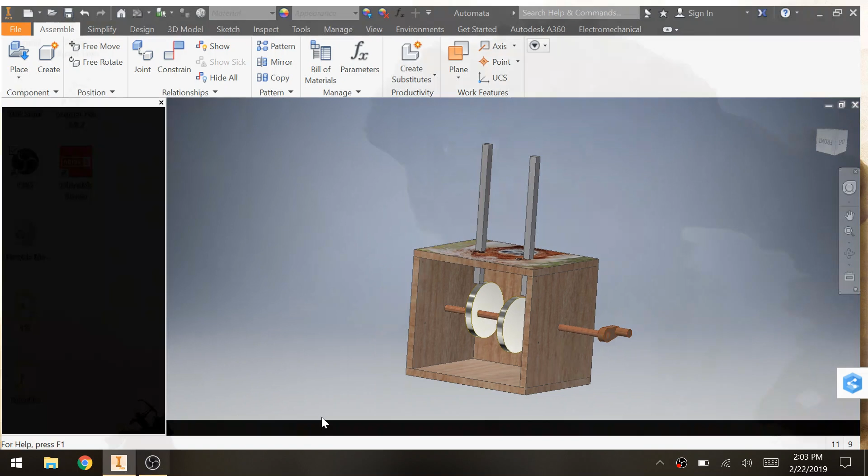When we start, this is the finished product, right? This assumes that you have finished all the pieces that you need. And obviously, as you're making this, if you figure out that you don't have a piece that you need, you'll be able to just make it, and then you continue the process, okay? So right now we have 1, 2, 3, 4, 5, 6, 7. I have 8 unique pieces.

If I go to my folder where everything is stored, it is... So I have my own folder called Automata Parts. And I have 1, 2, 3, 4, 5, 6, 7, 8 unique pieces. I'm going to tell you right now that some of these, especially like the side, top, and top bottom, you might just make copies of, and you don't have to. Oh, when we get there, we'll get there.

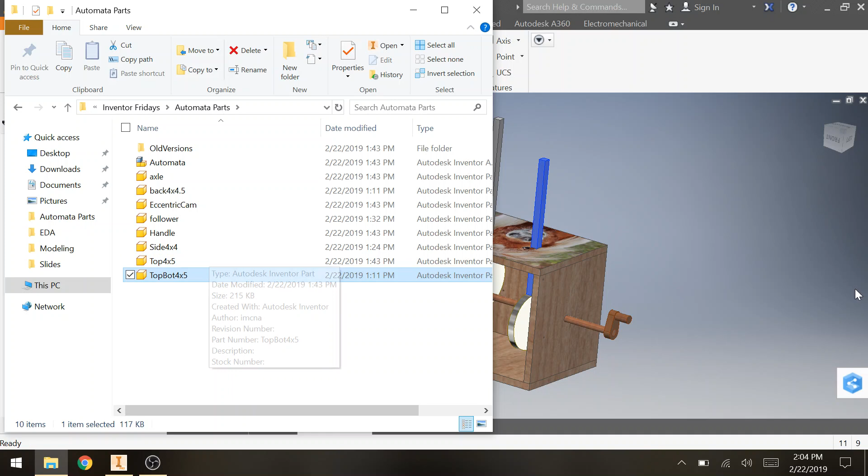All right, so let's get started. Let's make a new one. So for making an assembly, first we're starting with a .iam, right? English units. Press create.

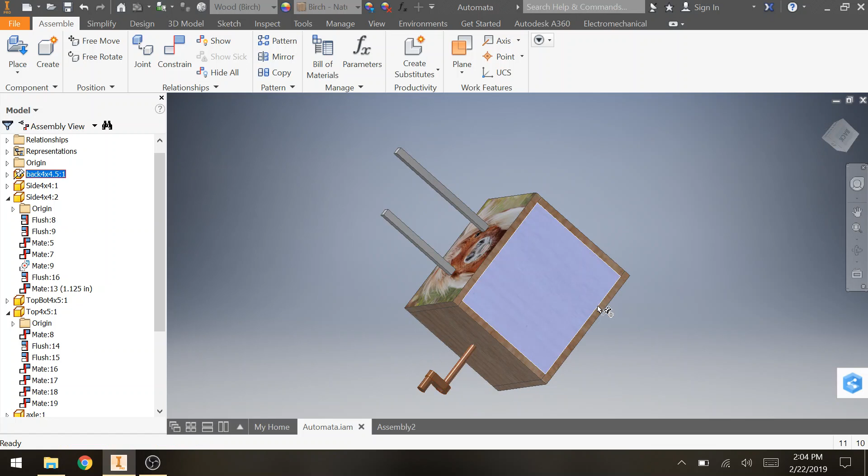Cool, and so we'll use this as reference if we need to. But now we're going to get started. So the first thing I want to place is my back piece. So my back piece is just this one right here. This is the one that's the weird numbered, weirdly dimensioned shape. It's the one that's the 4.5. So thankfully, the way I labeled all of my pieces is I named them what they're for, right? This is the back 4 by 4.5 piece. So I double click on that.

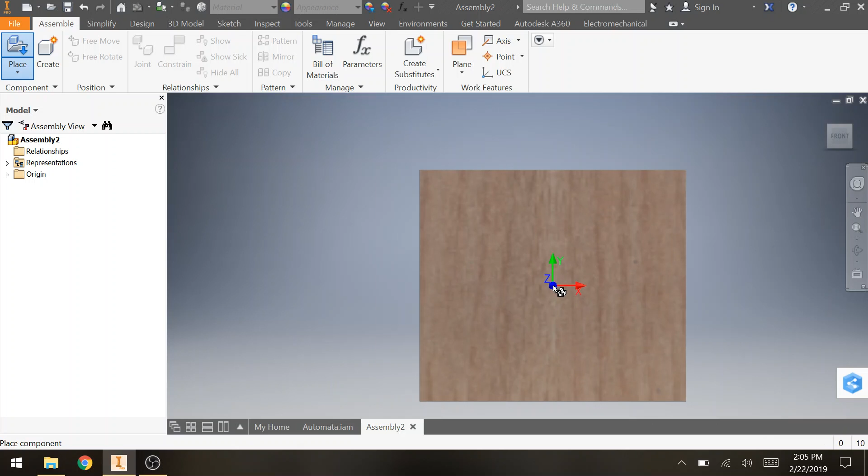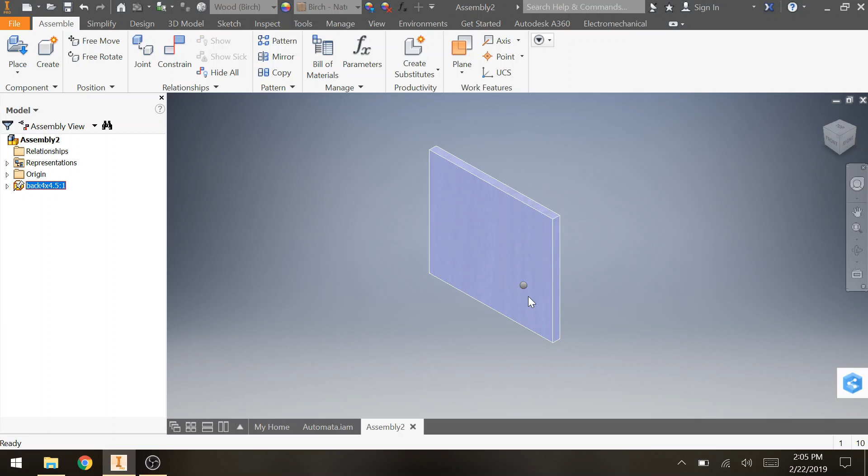Press open. And this is going to be very important - this is going to be the first thing that you write down. Well, first off, you probably don't need to write this down, but obviously when we're doing place, we're not placing from any of these. We're just doing the normal place. But the first thing we do is this moves around - we don't want that. We want to right click on it and ground it. And by grounding it, it basically removes or fully constrains it in such a way where it can't move at all. So now, when I try to click and drag, it won't move. But when it's not grounded, I can move it. So I ground it. We're good. If I press home, it zooms in on it.

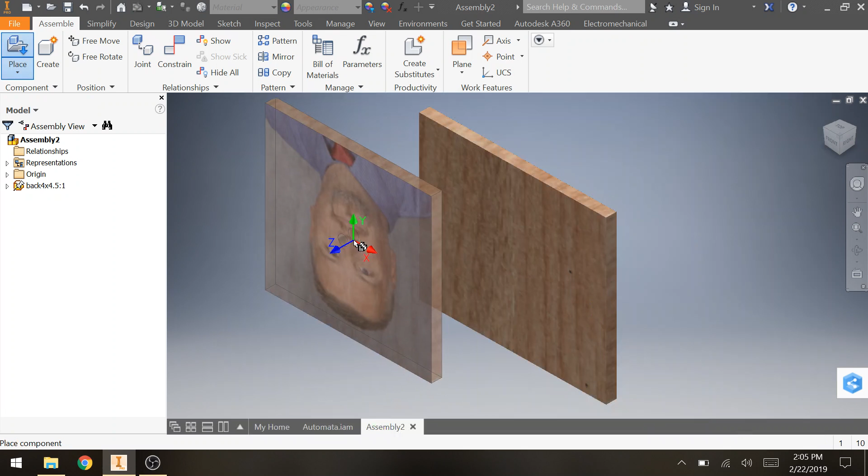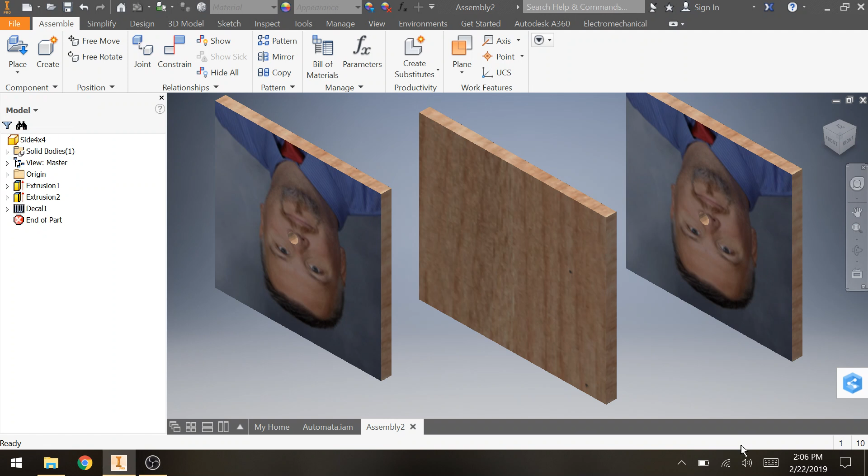Great, so now what we're going to do is we're going to start with the side pieces. So I go to place. And this is going to be the thing that's going to be kind of annoying, and I'll show you in a second what happens here. So you're going to see that this one already has Mr. Queenet's face on it. Something that happens is because these two pieces are the same piece, they're the same exact file. So if I open up the original file, open, I got to go all the way back to it. It's in documents, it's in, and then I go to the side. So there's only one of these, right? If I open it, you'll see that it has a hole here, and it has this picture already on it.

So I'm going to do a couple things to this, and you're going to see what happens here. So I'm going to get rid of this decal. Okay. Now check out what happens in the assembly - no more face. In fact, even in my original one, no more face. Right? Because they're all connected to the same exact file. Let's go back to here.

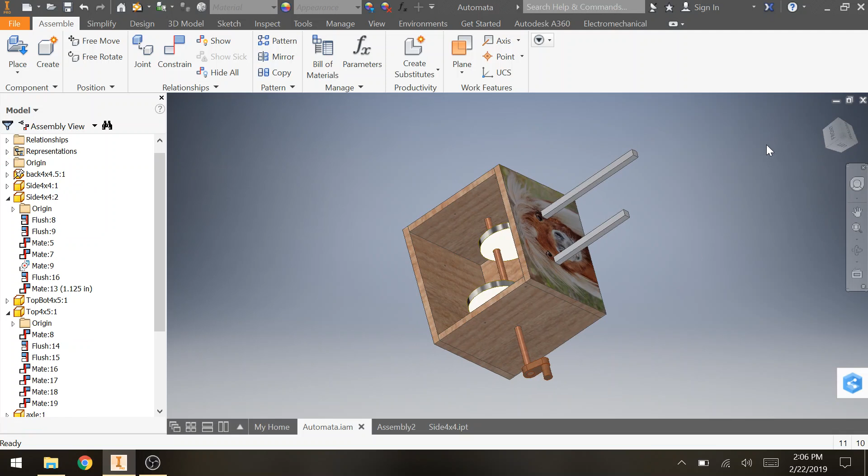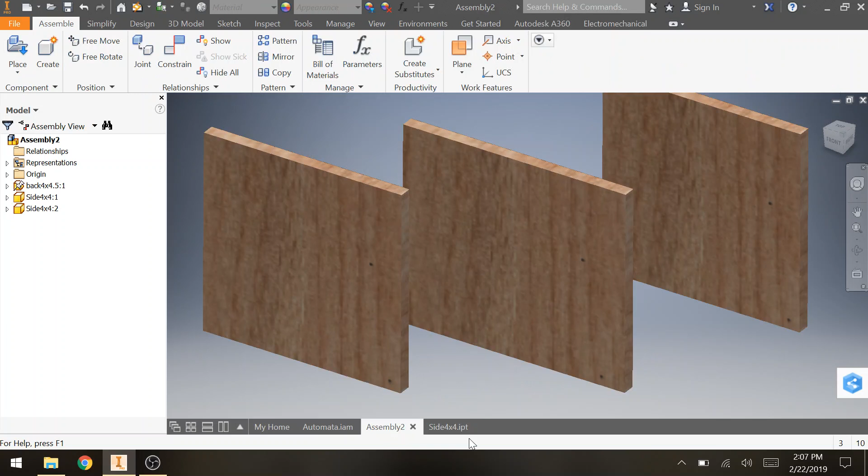I also want to get rid of the hole for now because does the hole look centered? No, but I can guarantee you that in the box itself, it is centered. And you're going to see exactly why. So I'll get rid of this for now, just to show you how we'll kind of work with that. So now we have this blank piece right here. We do File, Save. We go back to my assembly. And now we have my two side pieces, and we have my back piece that I can't move.

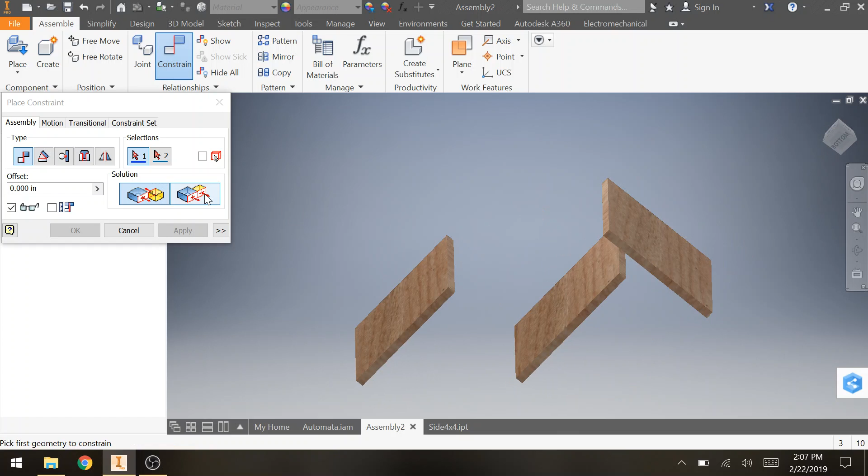Okay, that satisfying sound means we did something right, hopefully. Now I'm going to make these two sides flush. So the bottom of this, press apply. Bottom of this, back of this, press apply. And we look at it. Ooh, it looks pretty good, pretty good.

Press escape for now. Now I'm going to do the click and drag test. I click and I drag it. If it's not moving, we're good. So now we're going to do the exact same thing with this one, with the other side.

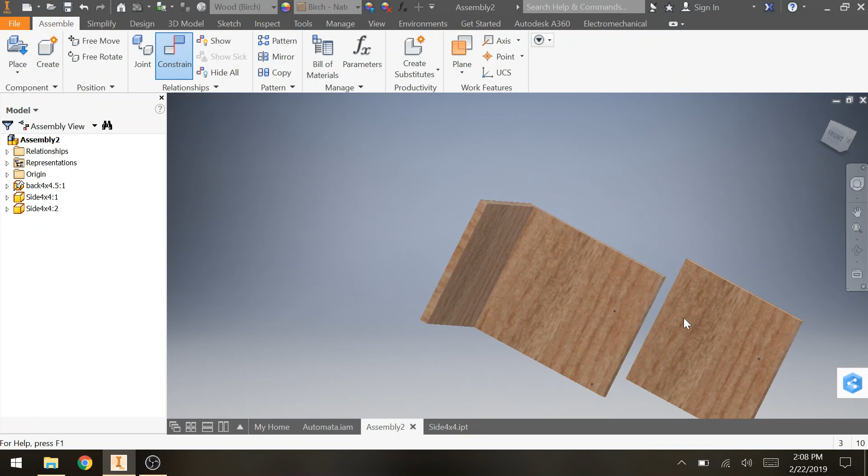So I'm going to choose either face. It doesn't really matter which one I choose, right? So I could choose the back one. And that one is going to be glued to right here. Then I'm going to make these the bottom and back flush, so this bottom piece right here with this part right here. And then we want apply.

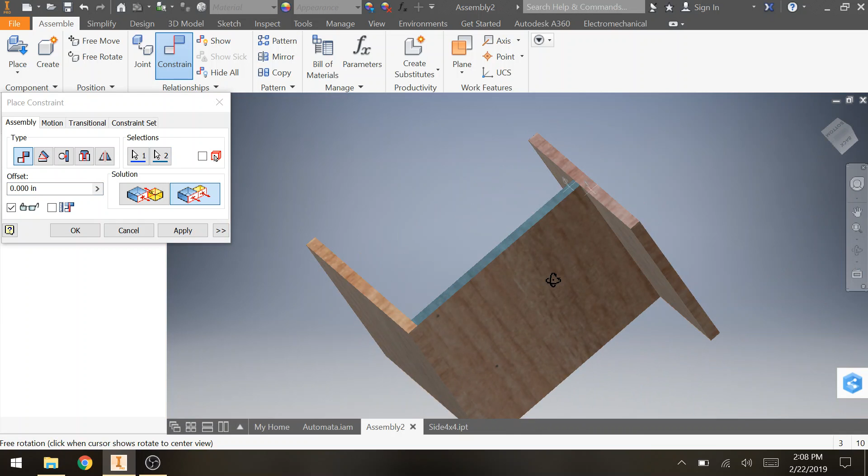Want this one and this one to be flush. Notice the flush constraint, right? Press apply, and get out of that. Let's go back to home. Bam, looks great. When we do the click and drag test, it's good.

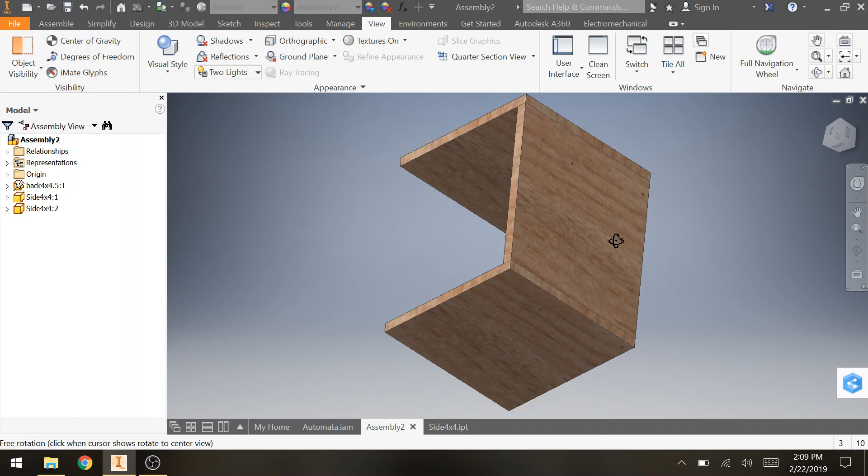Something else that might be helpful is go to view. I'm going to change the visual style to shaded with edges. This way it just lets me see where all the little edges are. So if I zoom in a little bit there, you can see the edge. Cool, so now we are going to go to the top and bottom piece.

And here's the issue I run into. Do you see how I have a top and then I have a top bot piece? I need to cut holes in one of these, but not holes in the other one. So do you know why? Can anyone tell me why I needed to make two files?

There's going to be the hole for the followers at the top, and then at the bottom it's just one solid piece. It's supposed to be one solid piece. If I put holes in one of the files, it's going to put holes in all of the top bottom files.

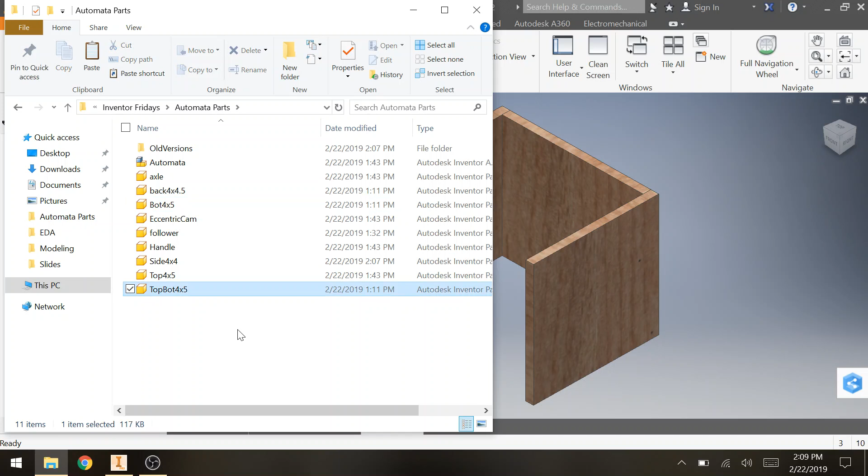So the way that I did this, all I had to do is I just clicked on this one, did copy paste, Control C, Control V, and then I just renamed it. I'm going to call this one bottom 4x5. So now I have my original one, I have a separate file for the bottom and a separate file for the top. This way I can edit one and it won't change the other ones.

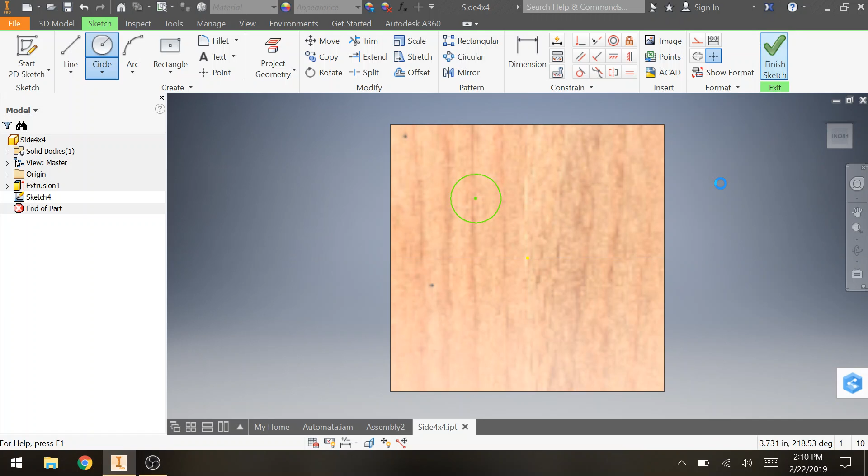So to show you what I mean, keep in mind how these two side pieces are exactly the same, right? If I put a hole in one of these, I'm just going to put it in a random place right now. Extrude, cut, bam. Okay, so there's a hole in this piece, but this side 4x4.ipt is connected to these ones, right? And so I can't do anything about that. There's going to be a hole between both of them.

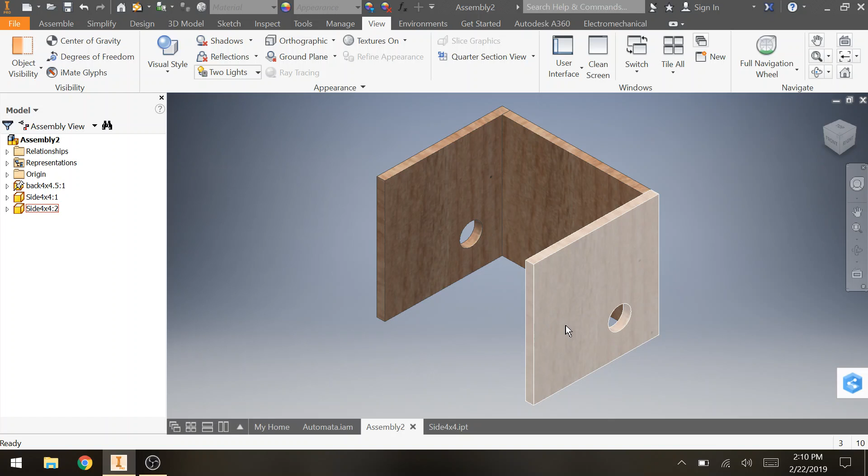Right now for me, this is fine for these two because they're symmetrical, but for the top and bottom, they're not symmetrical. So I'm going to get rid of this piece.

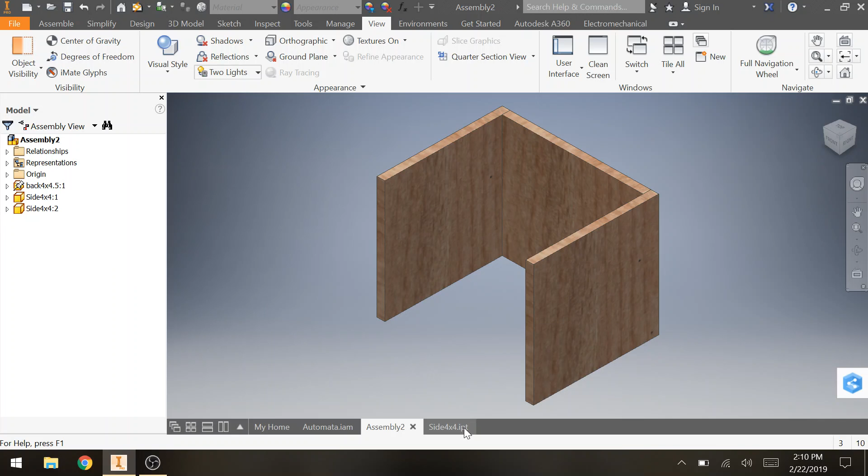There we go, we'll save it again just to make sure. Finish, get rid of the sketch, don't want to have extra sketches. Save. We go back to my assembly, and everything's good to go. Everything's normal again. Okay, so let's add in our top and bottom piece.

So I go to Assemble, Place. We go to, I have a top one and I have a bottom one. So let's do, I'm going to be using top bot 4x5 and my bot 4x5, and I'll show you why in a second. So my bot 4x5 is the bottom piece of my Automata.

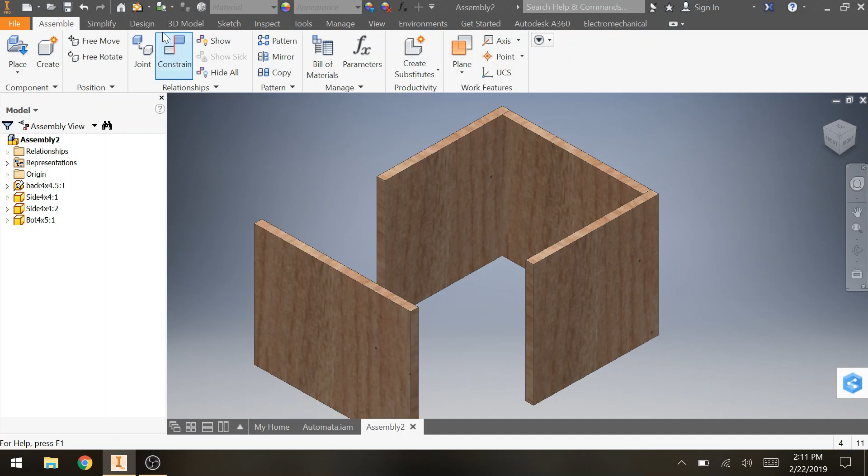So I start here, do the same exact constraints I've been doing the whole time. So I want to make this one to the bottom of these faces. Press apply. And then I just need to make some of these flush now. So this will be flush with this, apply. This will be flush with this, apply.

So anything that you see me do that you think you should write down, just write it down. Be like, okay, in order to do this, I need to click this button and then these two sides. So now we're done there.

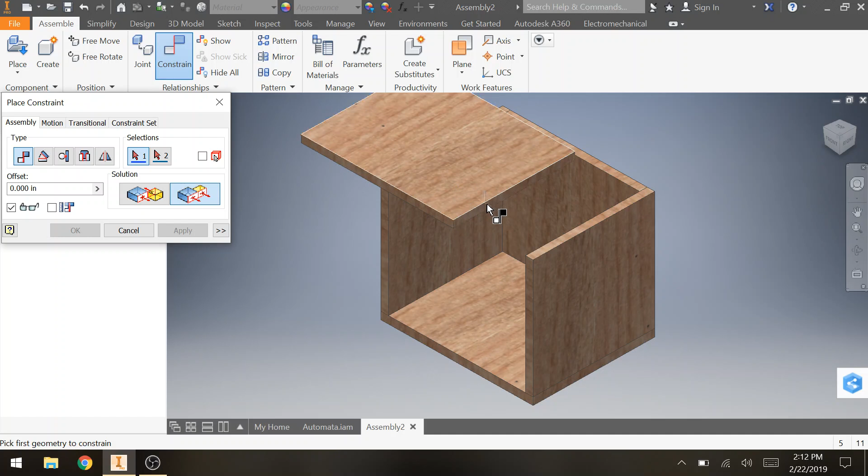Now go back to top view. We're going to do the top of it. So go to place, go to top bot 4x5, press OK. There we go. And then I'm going to just do the same constraints I've been doing. Apply. Make this side flush with this side. Apply. Obviously I'm going fast, so if you're watching this, you can go on like 1.5 speed or like half speed.

I guess 1.5 speed would be faster. So, and then we're good. And then we can do the click and drag test.

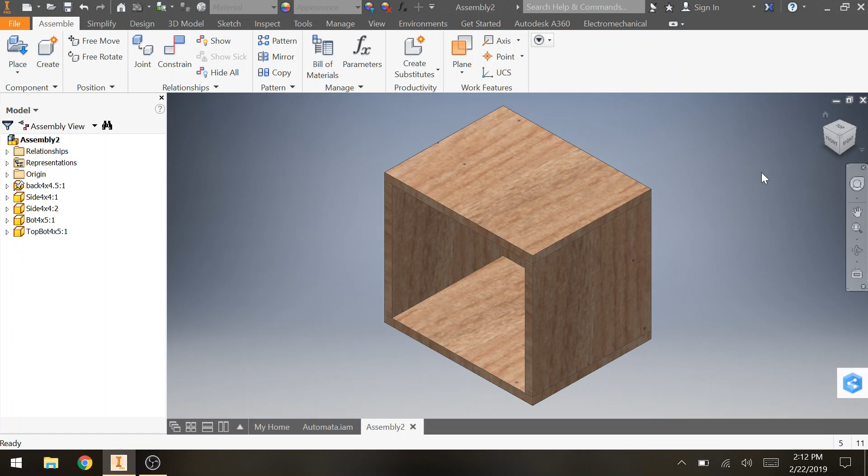Right, so we're good here. This is a nice, solid, just box. Now we're going to talk about adding in some of the different parts. We have to make all the different holes, right?

So here's the thing that is kind of weird. Okay, we know that this piece right here that's highlighted, it is a box. It is a perfect square, 4x4. But if we go and look at it in here, is the distance from this line to this line going to be 4 inches? It's going to be shorter.

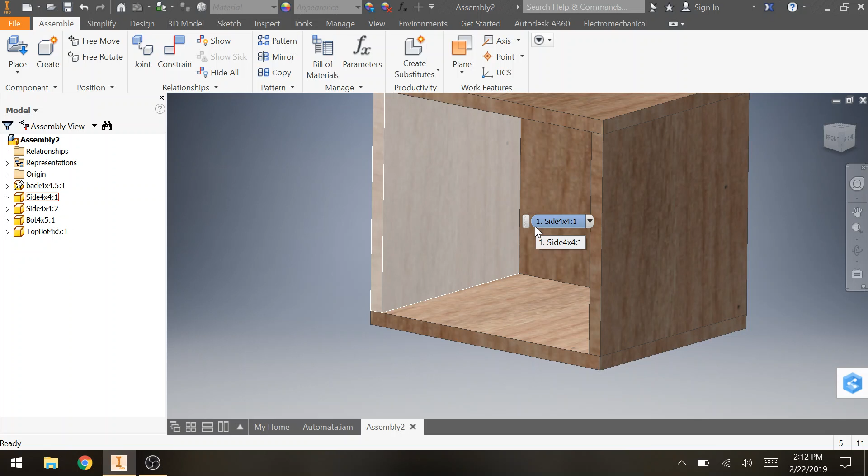And there's a way that you can measure exactly how long it is. If you go to Tools and you go to Distance, you can actually click on this line right here, and then click on this line right here. So this is 3.75. I want someone to store that in your brain. 3.75. I need to make the axle in the center of that specific distance, right?

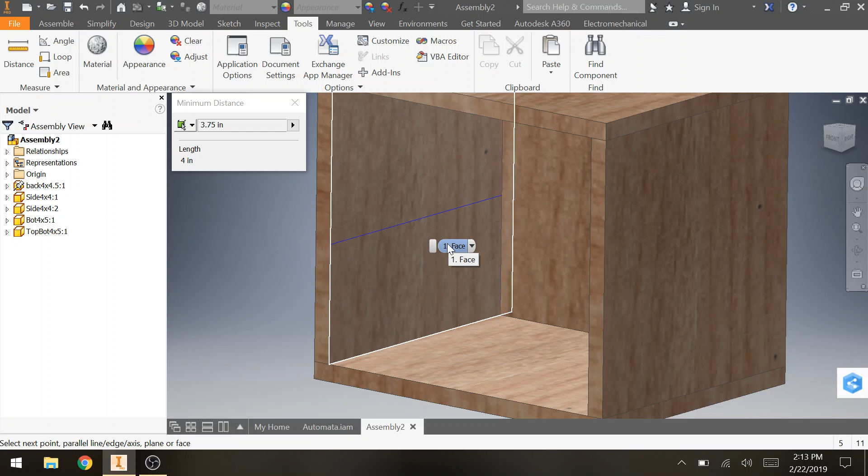Because that'll be in the center of my inside interior box. I don't care about the outside interior box. I need the inside interior box for that part to be centered.

And now, check this out, okay? If you double click on a piece, you can actually edit that piece. So I'm going to double click. And now, see how everything, you've probably accidentally gotten to here before, right? Everything gets kind of shaded out.

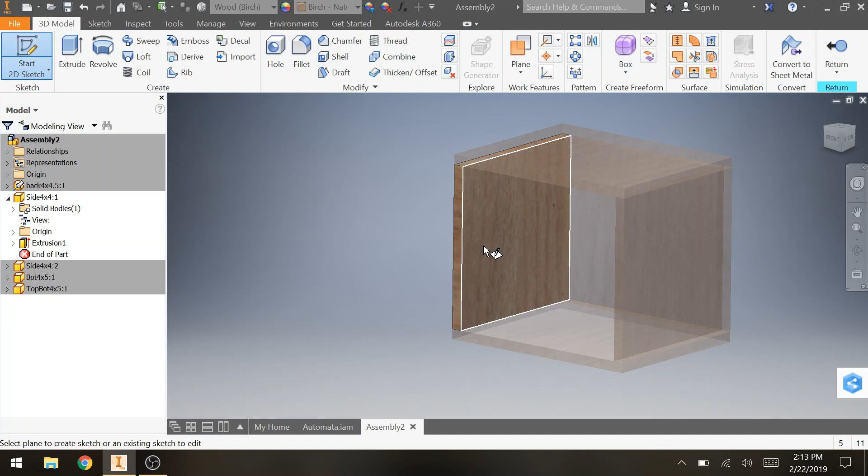Now I'm going to actually just make a sketch here, and I'm going to make a hole. So I'm going to start a 2D sketch. This is the same way I've been doing everything before. I'm going to draw on this face.

Now here's the harder part. I know my circle is going to be on this line somewhere, but I'm not exactly sure. So I'll make this, it should be 0.25. And then, how far should the center of my hole be from this line?

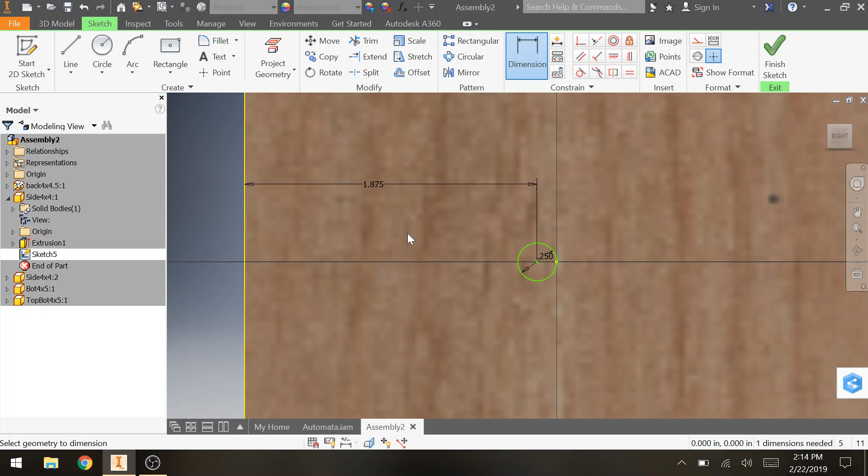Not 3.75, but half of that. So what I can do is do 3.75 divided by 2. Press enter. And it's pretty close, but that's good. Perfect. So we do finish.

Great. And we can also even look at this one. That looks good. They're lining up here. And then we just go to extrude. And then instead of that, we're going to go to right here, cut. Press OK. And then we go to return. This is important. Return. And now we have a hole that is in the center of this box right here.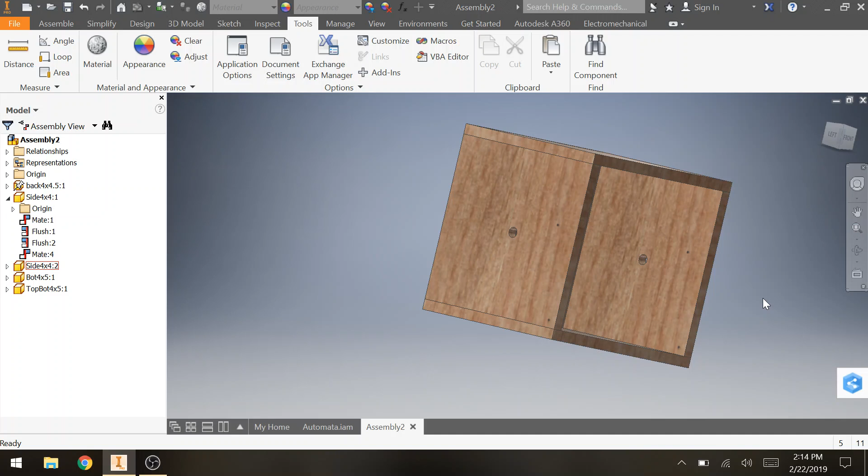So now we're going to do the top ones, right? So we're using square followers. So same idea. We just double click on the top. And I'm going to do a top view like this. And now I'm going to start a 2D sketch. So what I'm going to do essentially is I'm going to make a bunch of lines

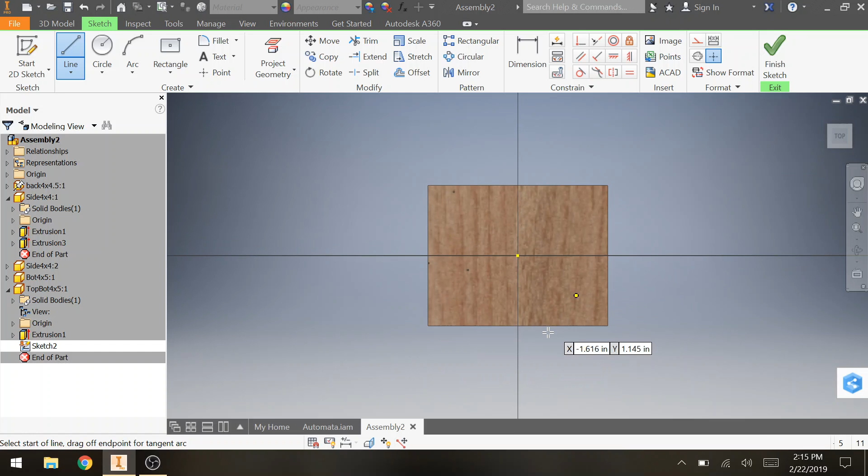so that I can be 100% sure that my followers are going to go exactly on this little axle line here. So I'm going to make a line like this. Let's go to the top. This line's going to be from this edge. See how it turned green? And then I'm going to make this that exact half distance. So it's 3.75 divided by 2.

So now, right, if I make a line that is parallel to the edge of the box right here, anything that I cut into that side or cut into that line, they're going to fall exactly onto my axle. So I'm just going to make another line from here. And remember, if it turns green, that means it's locking into something. So I click there. I make sure that I'm 180 degrees. I go all the way to the edge here. 180 degrees, great. And then I'm going to go back the way I came. Great. And these lines, they're just for me to know exactly where I'm going to put everything.

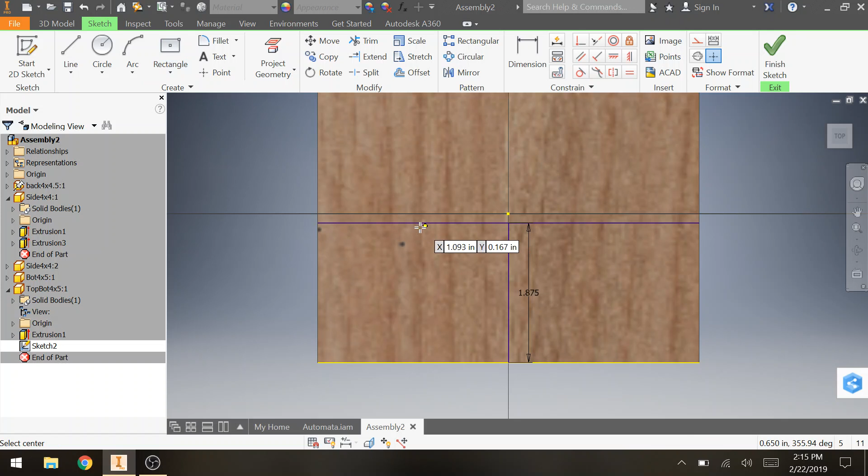So I'm using squares. So I'm going to do a 2-point center rectangle. For many of you, if you're just selecting this or just opening Inventor, you'll need to go to one of the options, so 2-point center. So I want the center of my rectangle, right, to be on this line. So I click. It's going to be 0.25 by 0.25. So I just did 0.25 tab 0.25.

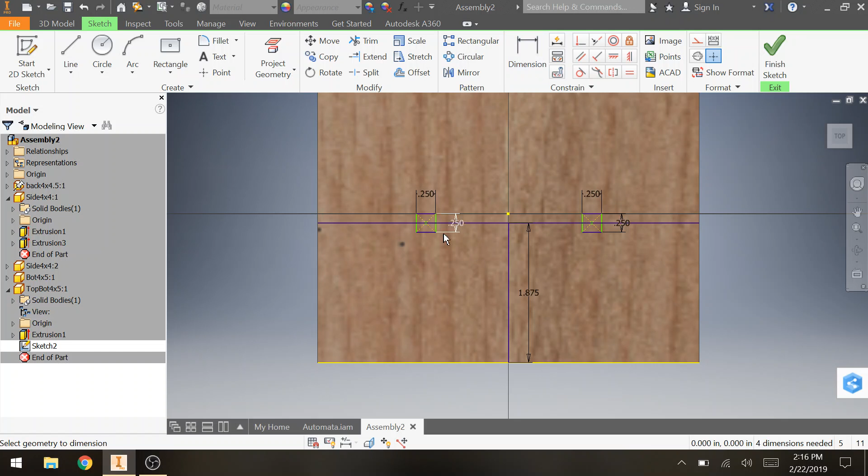And I'm going to make another one. Right, make sure it's on that line. 0.25, 0.25, enter. And now I'm going to press escape. I'm going to use the dimension button to move them a certain distance away from each other. So I want them to be, how far should they be away from each other? You can choose. 2 inches? Does that sound good? Sure, 2. Yours might be different.

You just have to measure it. So this one's 2. And now I also want to make them centered, so from here to here. So I have to do some math.

My box is 5 inches long from there to there, right? These two are 2 inches away from each other. So I think this one's just going to be, let's make it, what would it be? Would it be just 1.5? There we go, that's good. So now this 1.5, this one will be important for later, but this makes it so that everything's kind of nice and centered. That's good.

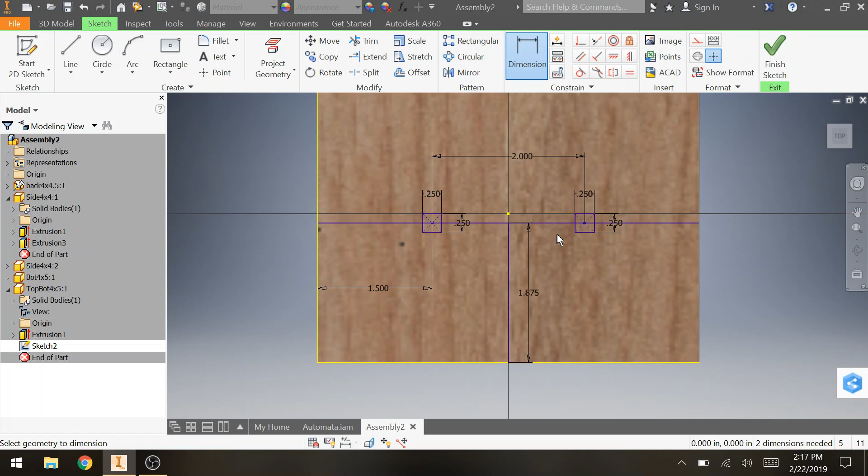So we'll do finish, and just like what we've been doing before, extrude. We're going to make a cut here and here. Press OK, press return, and there we go.

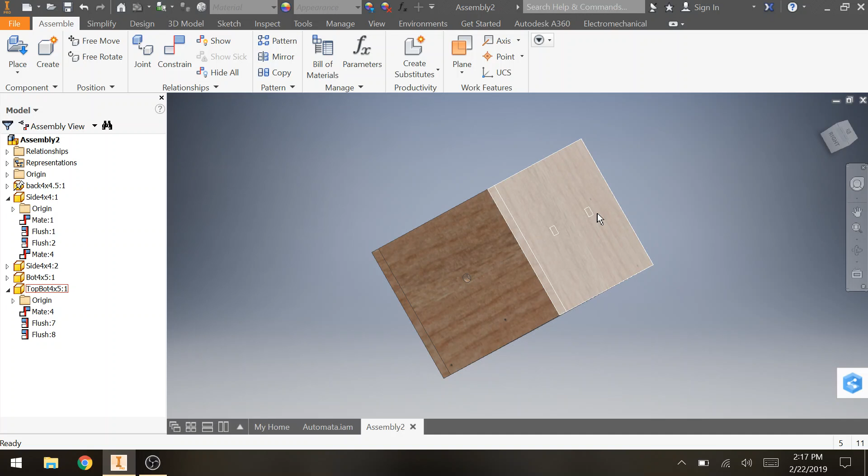Does that look good so far? Looks nice, right? And if we kind of look at it, you can see that the hole, the axle hole, lines up with the follower holes. And that's what we need to do, right? So with that one, you just have to be careful and be thoughtful about your measurements.

So now we're going to start adding in the other pieces. So let's go to place. We're going to do the axle, so we'll just do one at a time. My axle, I think my axle is 7 inches long, I just made it a random amount. So we go to constrain.

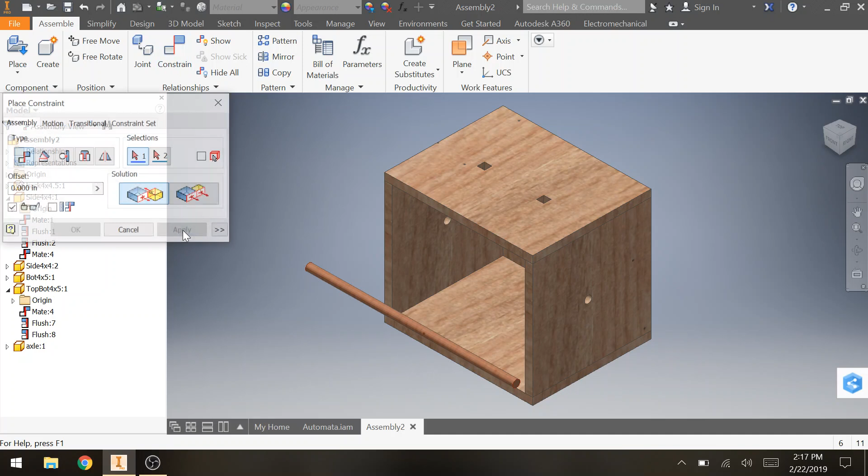For things that are circular, you can just mate the center lines. So see, make sure it's dotted like that, center line. You can do either one of these, doesn't matter, like that, press apply. And the other thing that I want is I want to make my axle flush with the other side of the box. So we will, it's a little hard to see.

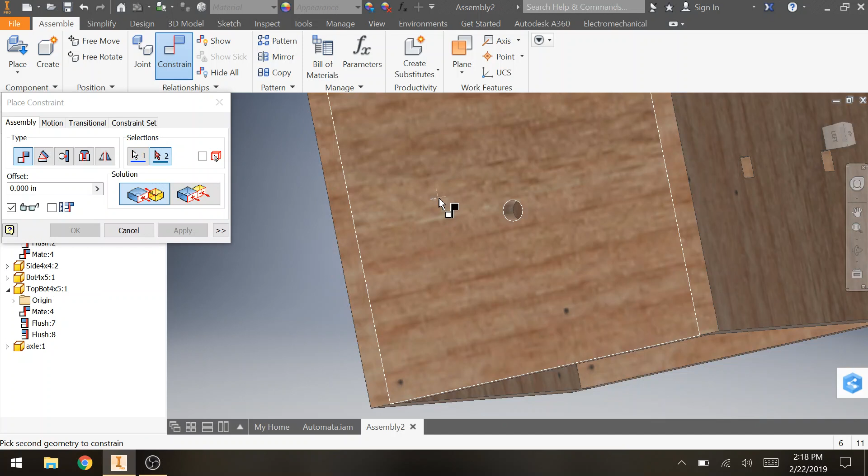So I did the wrong thing, so I just do flush. There we go. And I go back. Great, and you can't see it right now, but I can rotate this as well.

Cool, so now I'm going to get the handle on. So this is what my handle looks like, yours might look different. It's going to involve the same steps.

So we get that center line, we made it with this center line. Some of you, when you do this, it might actually flip around to the other side. It's fine, just make sure the two sides that you need to be flush are flush.

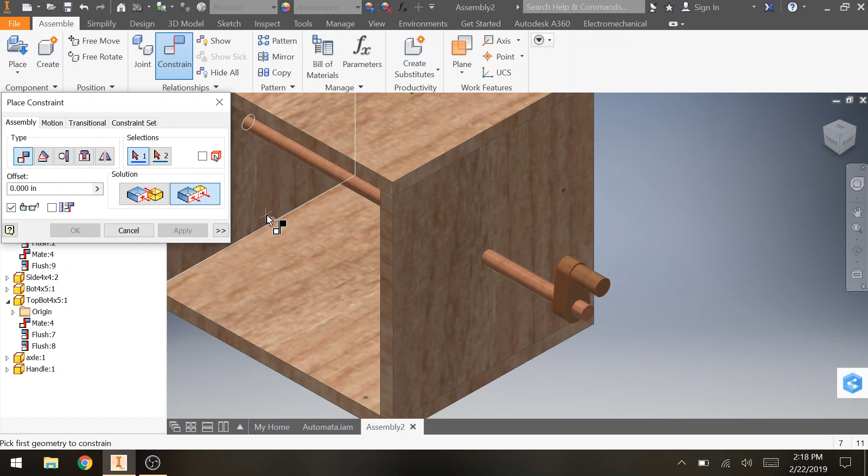So for me, I need this side to be flush and this side to be flush. But if yours was flipped around, you could actually flush this side and this side, and it would flip for you. But for me, I got lucky this time, they are the right direction. So I can just click, oops, flush, do, apply.

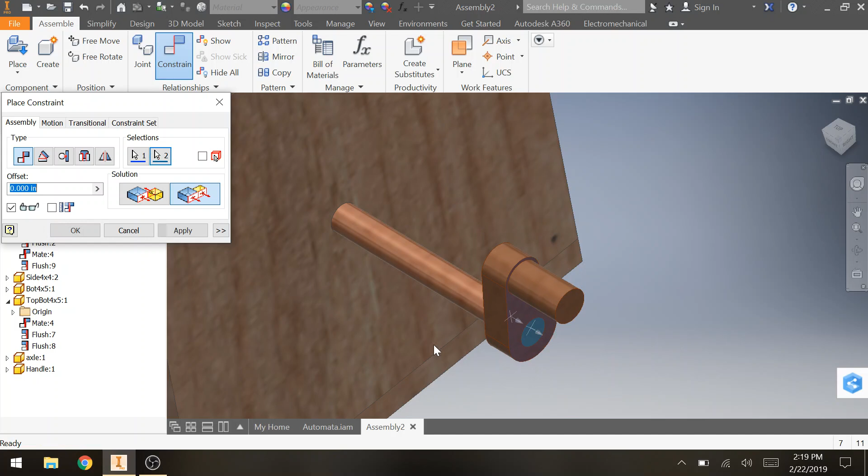Great, almost there. If I move this, the axle doesn't move, we'll fix that later. So now let's add the cams in.

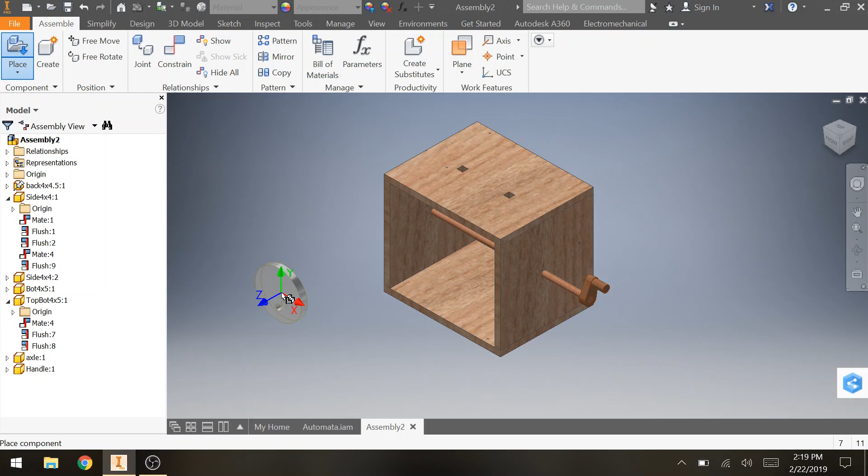Go to place, I'm doing 2 cams. And this is a special direction just for this project. For whatever reason, there are some weird things that happen with the animation part. So if you're having big issues using snail cam, hex cam, whatever other cam, just use an eccentric cam and I will accept that, even if in your real project you're not using eccentric cams. Okay?

So we have these two. I'm going to constrain, same idea as before. These are circular, so we mate the center holes with the axle. And we also press apply. And we do the center hole of this one with the axle. Great, apply. Let's look at it now.

They are not even, right? They're not in the right place. And I can move them. That's not good either. So what I'm going to do is I'm just going to mate them, but then I'm going to offset them. So I'm going to constrain.

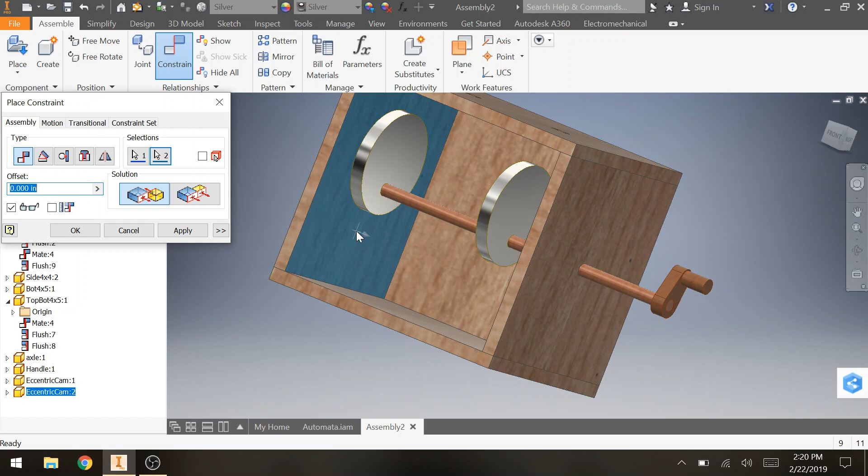Let's mate this side with this side. Obviously, we don't want it touching the wall, but does anyone remember how far away our cam was, or this hole was, from the wall here?

It was like 1.5. Actually, but there's an issue here, so let's just check. So let's go to Tools, and we'll just measure. So from this line here to this line right here, it's 1.125. So that's the offset I need, is 1.125.

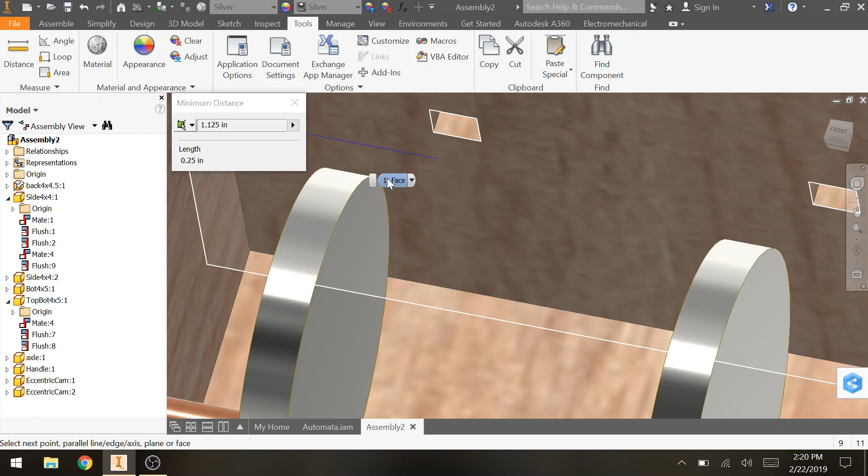So let's just do that again, because it was from the edge of the box. Exactly. So, and then I do my offset.

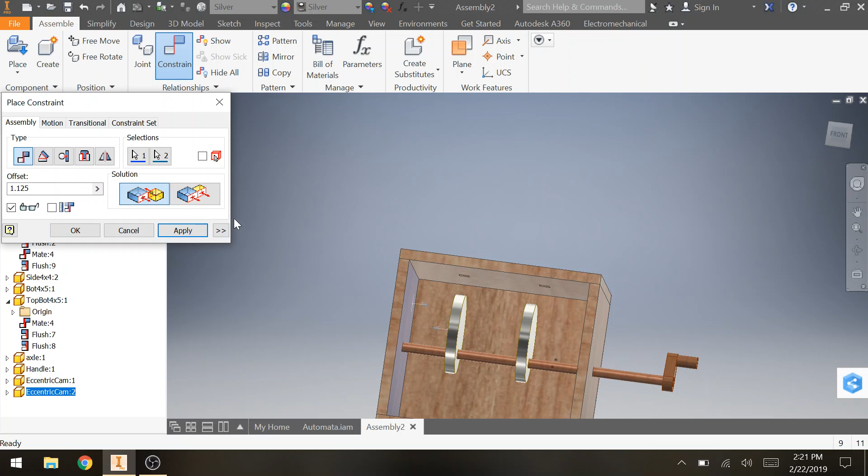So let me zoom out so you can see exactly what's happening. So this is normally what mate does, but then I go to offset. It is 1.125, and it moves. And look, it's like perfectly lined up. Press OK, apply.

And we do the same thing over here, here and here, and we do 1.125.

And now when I spin this, nothing happens. But if I do my moving test, it's staying on the axle, that's good. Everything's staying where it should be, and it basically has the attributes I want.

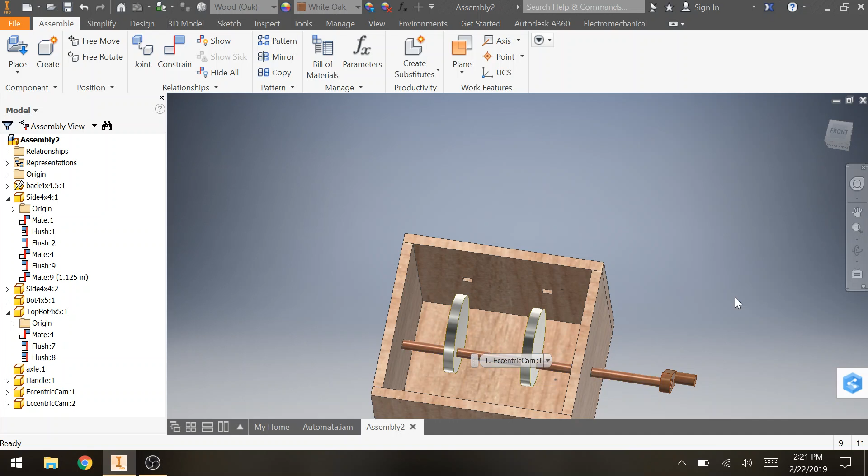The next part is probably one of the hardest parts because we're mating planes that are internal to our object. So what I'm going to do first is start here. Notice when I click on the handle, in my browser it also lights up. Let's clean this up a little bit, close these.

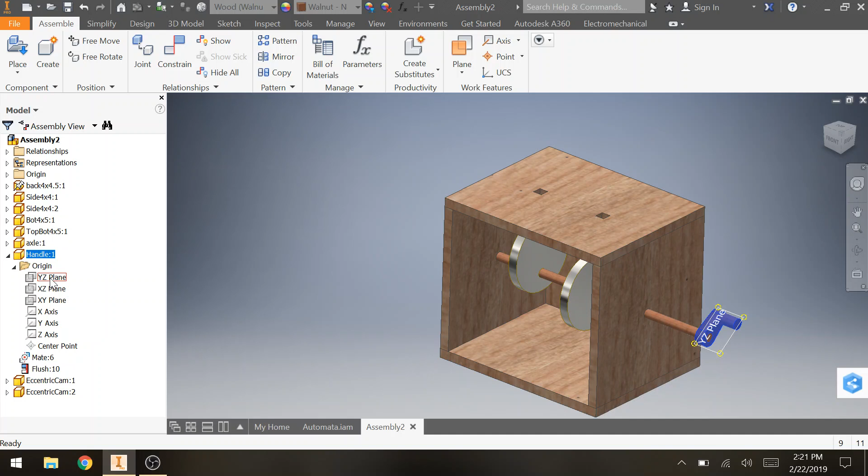So if I click here, handle lights up, go to origin. And I want to make one of these planes visible. The one I'm going to make visible is this one right here. For you, it might not be the YZ plane. You need the plane that basically goes through the center of it, the one it'll be rotating around. So I'm going to right click on this, make it visible.

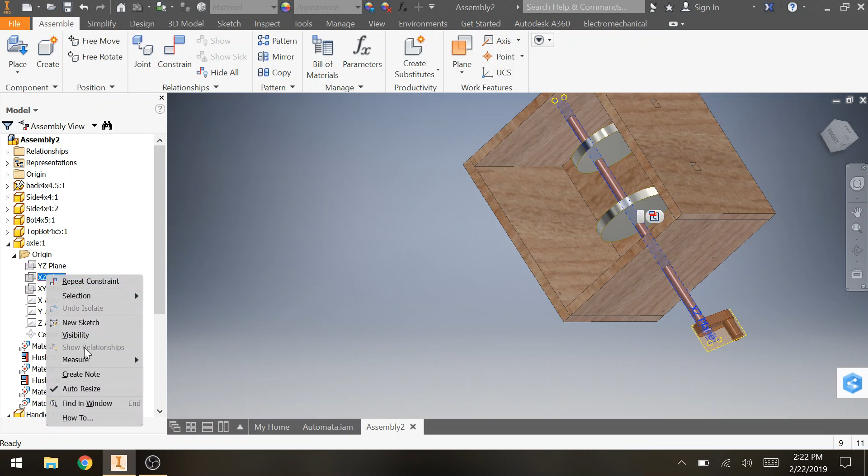Do the same thing for this one. We go to axle here, go to origin, and we're just looking. Okay, this one doesn't look right. That one looks pretty good. So make it visible. And we need to do that for our cams as well.

Just cleaning this up a little bit. Origin. That one is actually pretty, it doesn't really matter, either one of these is okay. The one that would not be okay though is this one, right? That's not the way we want to rotate. So, sure, let's do this.

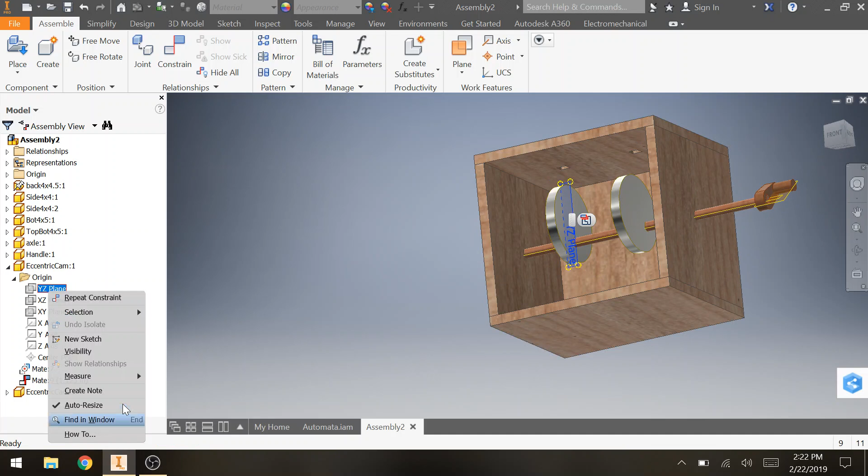So now we have all of these here. Notice how when I made one cam visible, the other one was automatically made visible because the files are connected. So now I'm constraining. With some of them, we can just easily constrain like the planes, and Autodesk is cool with that. So now when I rotate this, you can see that my axle moves.

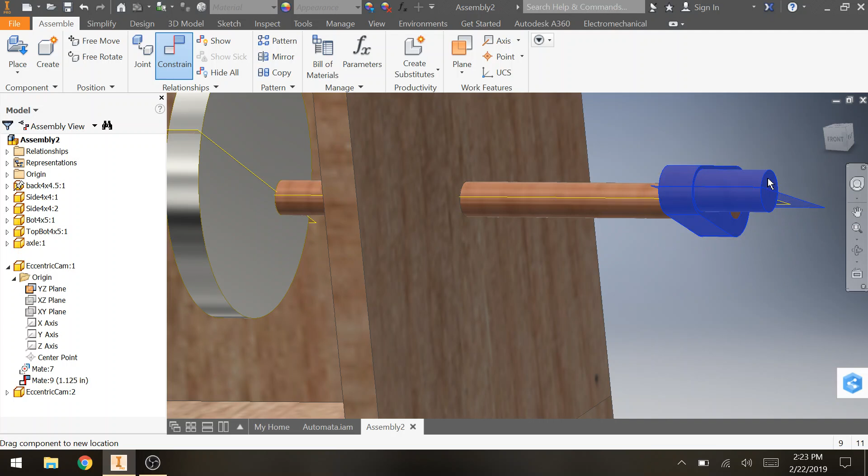Now the other thing that's maybe a little bit harder is this one. It might work if you made it, but if it doesn't work, you can also go to angle constraint. So go to angle, we're going to click on directed angle, and we'll click on this one, and either one of these. Press apply, and then this one, same one.

They're the same direction. I'm going to make this one 180 degrees, just to make it a little bit different. Press apply. You'll have to play with this angle to figure out exactly which way you want to have it. So now, when I go back, look at that. Whew, we're almost there, we're almost there.

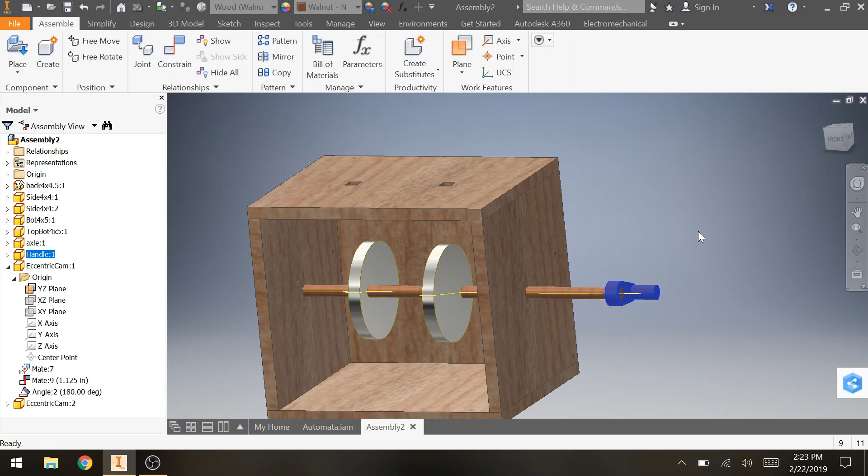So now the followers. There are some special rules with the followers, and I'll go through them right now. If you ever have issues with them, just look at this video again and use the followers that I created, use the eccentric cams, and you should be good to go. So let's place the followers.

Follower. Got two of them. And so now, with the circle ones, we would want to just mate the center lines. Are these circles? No, they're squares. So we're going to just mate the sides of them.

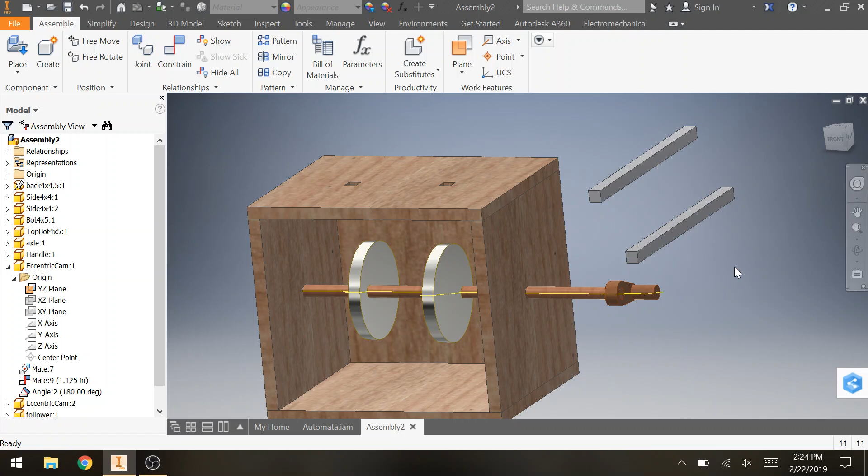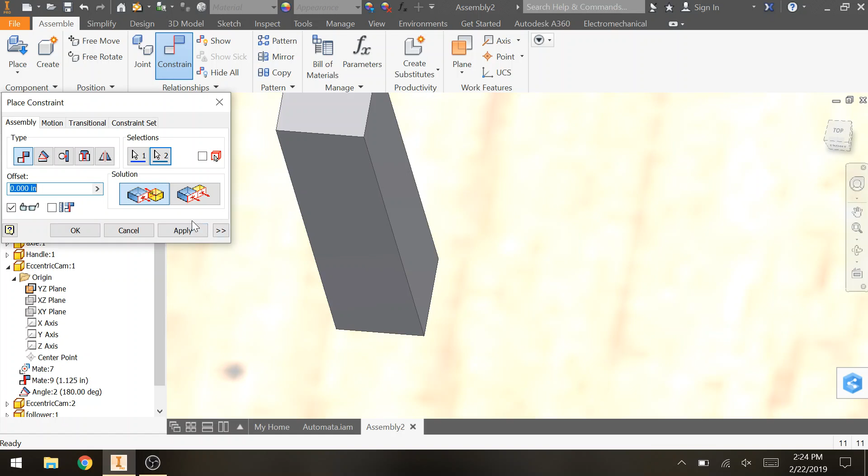Okay, so we constrain, and what I'm going to do is mate this side right here, and I'm going to mate one of these sides here. So we'll do this one. Press apply. And I'm going to mate this face with this face. Press apply. Let's zoom out for a second.

So now, obviously not the exact thing I want, but I can just move this up. And there we go, right? It's not following yet, but that's okay.

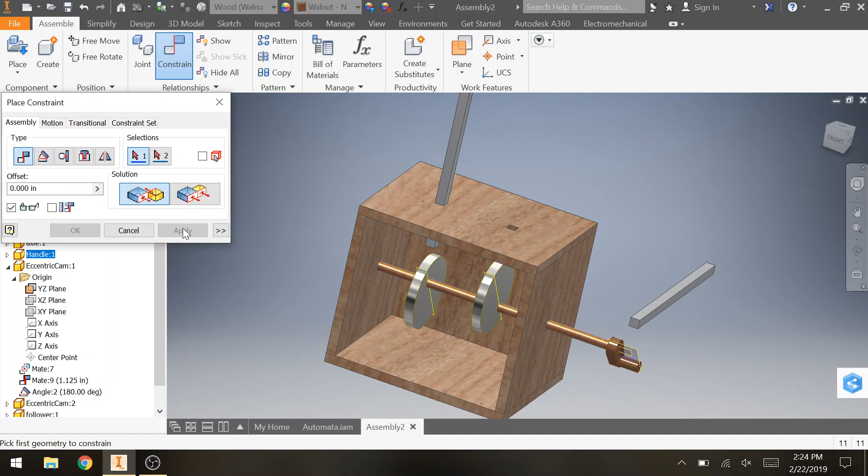We'll get there. So we're going to do the same thing with this one. I'm constraining basically two sides of the square 3D object that we have. So here and here. Cool.

And then I'm just kind of looking and trying to get the other one. If for whatever reason it's blocking your view, just press cancel. There's this button called free move. You can click on it, move this over just a little bit, and go back to constrain.

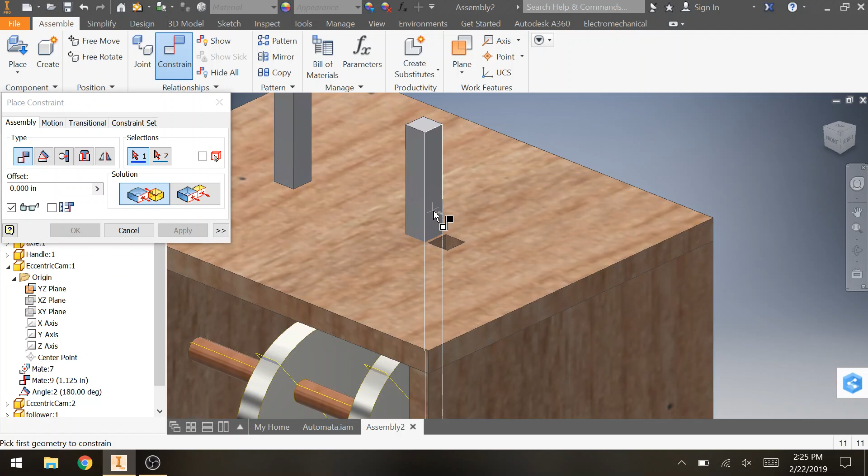So now it's a little bit easier. I can constrain this side and this side. Apply. Some of you, when you constrain these for the first time, your shape might go sideways. Don't let that bother you, just keep constraining it, it's fine.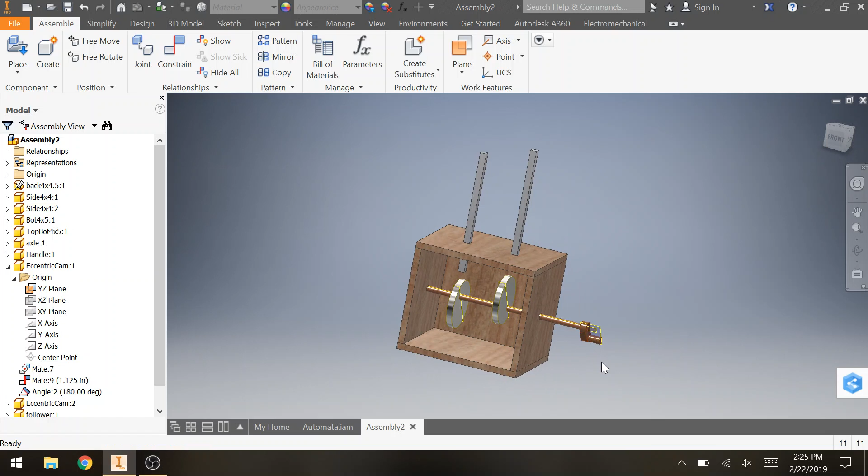So now we're almost at the very, very last couple steps. So we want to get this thing moving all together. So what I'm going to do is go to constrain. Because I have a flat bottom on my follower, okay, and a round edge that it's following, instead of transitional constraint, I'm using tangent. It's right here.

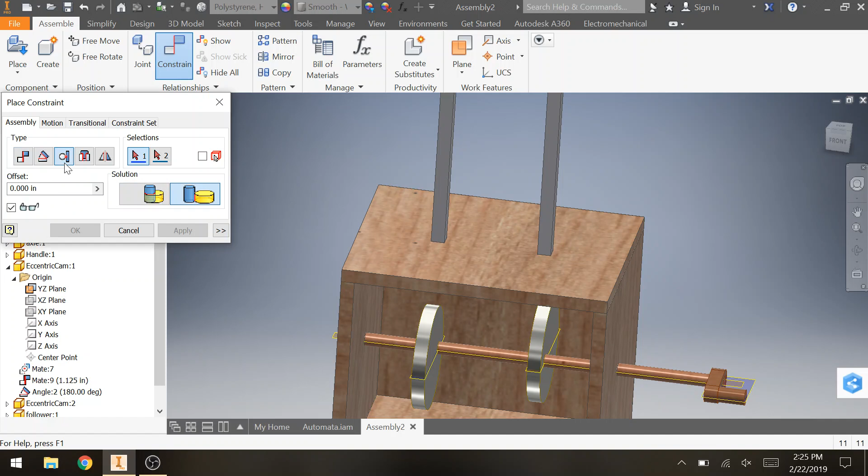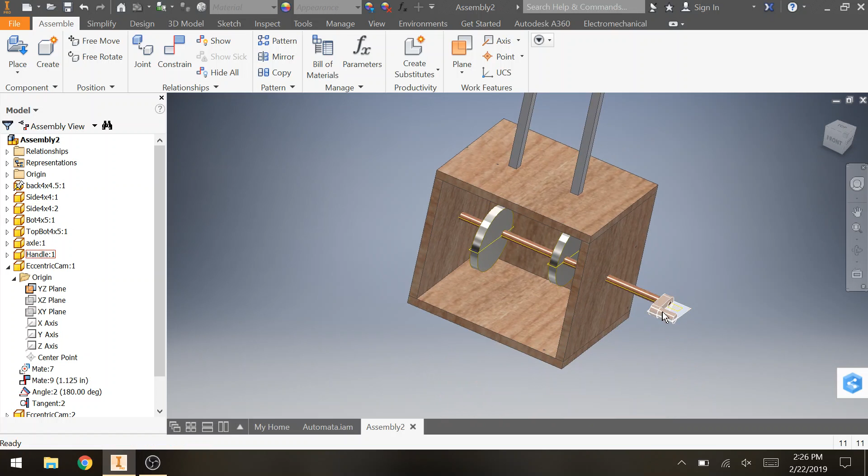So this is the one I want, on the outside. Check it out, this is what we're going to do. We want to do the bottom of this one—let's do this one first so you can see it—and the curvy edge of this one. Press apply, do the bottom, curvy edge. Let's see what happens. So it didn't break, that's nice. Let's get a nice view here. There we go.

So we have our functionally complete automata, right? Some other things we want to do.

I don't want to have these little planes here anymore, so I go back into the origin. I click on my handle, and now it's highlighted over here. Open it up, open origin, right click on the one that's visible, make it invisible. Go to my eccentric cam, origin, make it invisible. The last one was our axle, so I click on my axle, make it invisible.

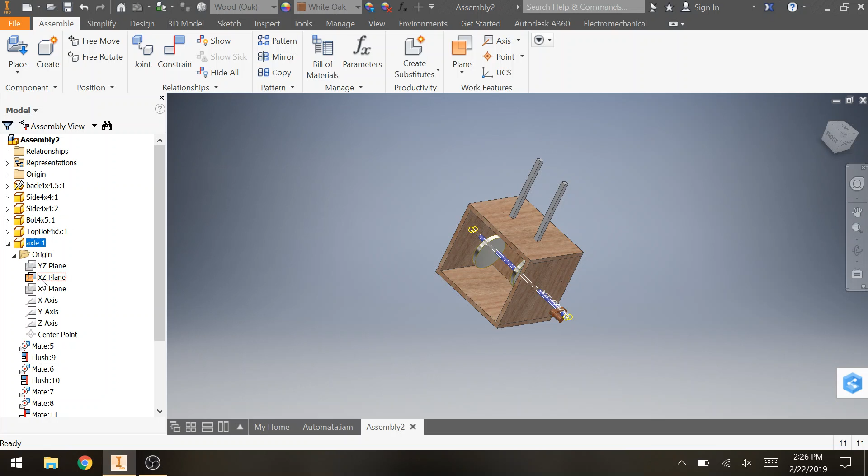If you can imagine, for some of you who are just doing things that simply go up and down, we're going to add maybe a little square piece up here. You'll put a decal on it, and you're almost home free. So now, if you're in Mr. Kunak's class, some of you already have pictures on it—this is me talking to the video now. In Mr. McNair's class, we did not do pictures yet, so I wanted to show you how to insert a picture in an assembly.

Okay, check it out. Let's do the back. Remember, when I double clicked on something, it allowed me to edit that thing. So I'm going to double click on this, and follow the exact same process I did before for adding a sketch or adding an image. I start a 2D sketch, click on it, then go to image.

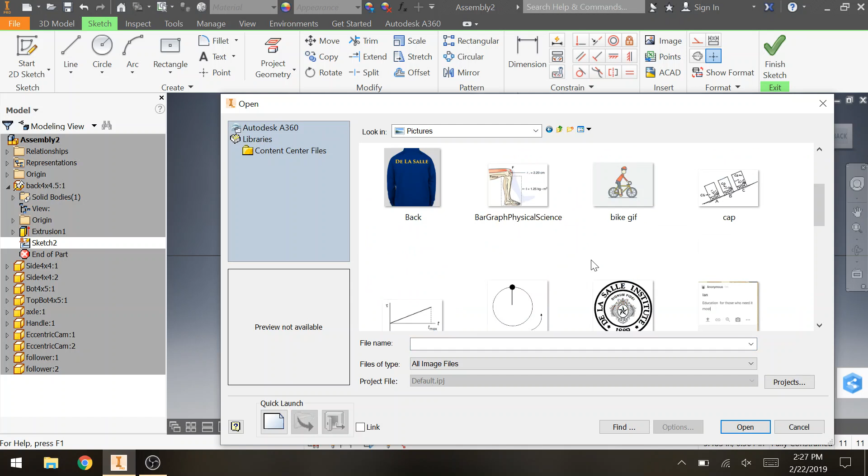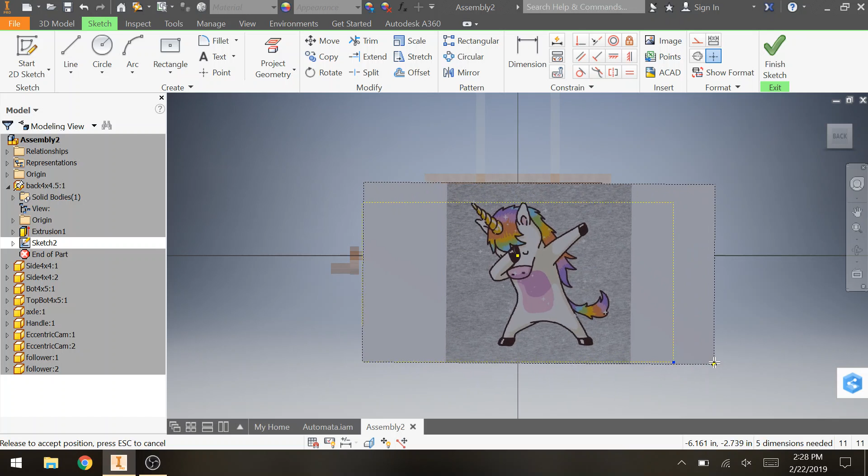Let's see what images Mr. McNair has. Let's go all the way back. We'll add this—ooh, we probably don't want to add a bike GIF. We'll add this unicorn, because I like this unicorn. Put it on there. Remember the top right-hand corner lets you move it, and all the corners let you resize it. So I'm kind of eyeballing it here, making it a little bit bigger, trying to make it a little bit centered, something like that. We'll see. Then we finish sketch.

To add the decal, it's just decal, the picture, the face, press OK. Bam, look at that beauty. Press return. Look at that. Amazing. And you can do that for every single side.

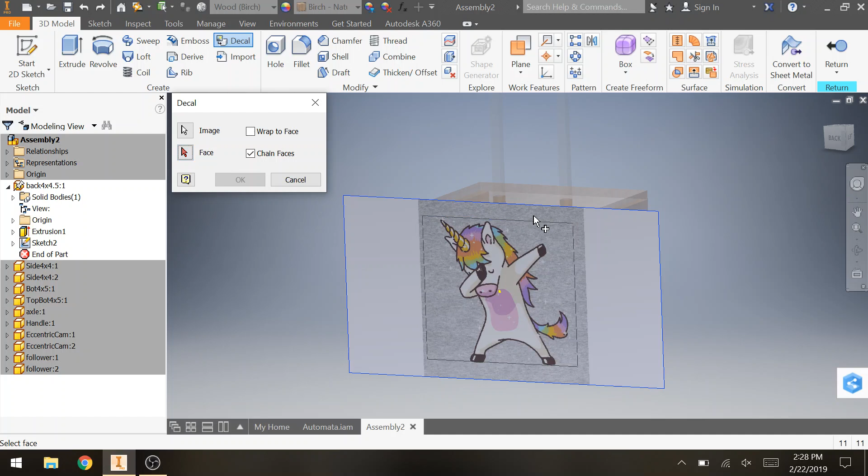If you look up here, you'll notice the faces don't have the picture on it. I'm not sure if you can do this, but let's see. Before I make the decal, go back to decal, image, and I think with the face we can click on multiple faces. No, we can't—it's just this one face.

So it's okay if your image doesn't have an image spreading across the entirety of it, right? I see some little wood pieces here—that's not going to bother Mr. McNair or Mr. Queenan, I'm speaking for him. On this face we can do it one more time—we just double click, start a 2D sketch, and click on the face I want to sketch.

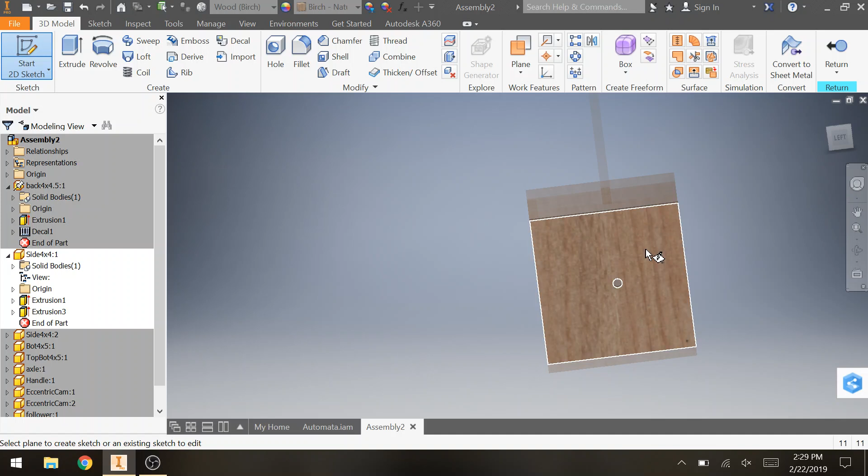Here you're going to see the pitfalls of using just one unique file, right? I'm going to put a picture on this face, and we'll see how a picture is going to show up on the other face as well. So we do image—oh wait, did I start a 2D sketch? I did, okay, we're good.

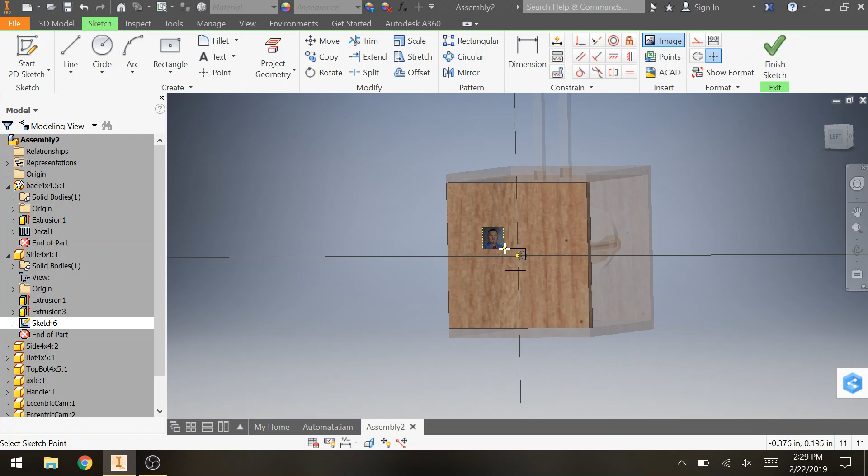Let's go back to, I think I want to go to downloads. Let me find a Mr. Queenan one—this one? Yeah, here we go. Also too small, can't have that. There we go, perfect. So kind of grab the top right-hand corner there. Now I have a really bad view, so I'm going to change my view using the view cube. Make this a little bit bigger. There we go. I want to post everyone's favorite teacher, right? Because we're trying to get 100% on this. So, finish sketch.

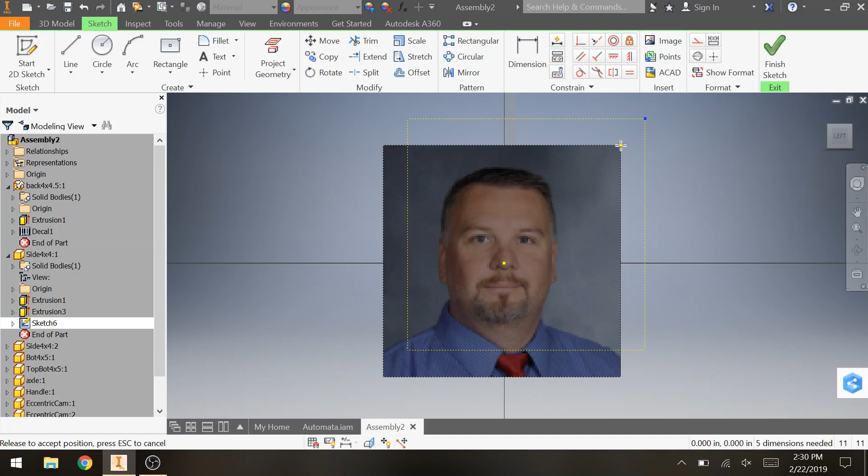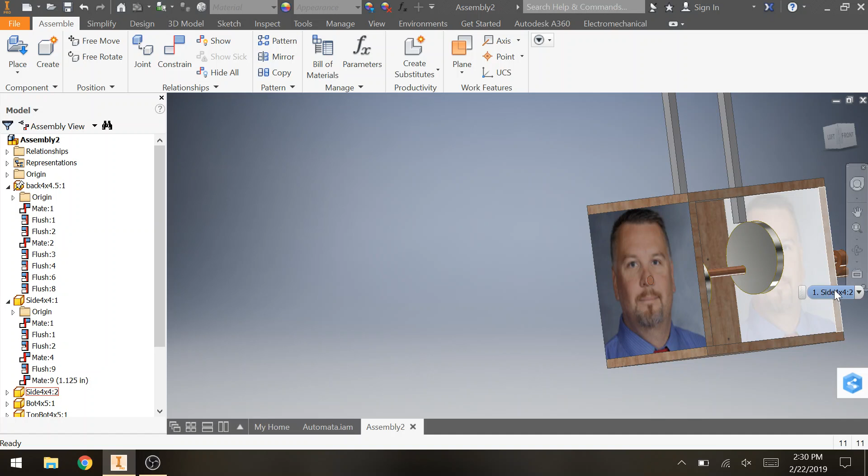Decal, image, face, okay, bam, return. But also notice, because these are connected files, it's also on the inside. That's not a big deal to me either. If you need to, like if you have an image that's not supposed to be on the inside, whatever, that's okay. You'll need to put an image on every single one of these sides except for really this bottom piece. But yeah, other than that, this is the completed Automata.